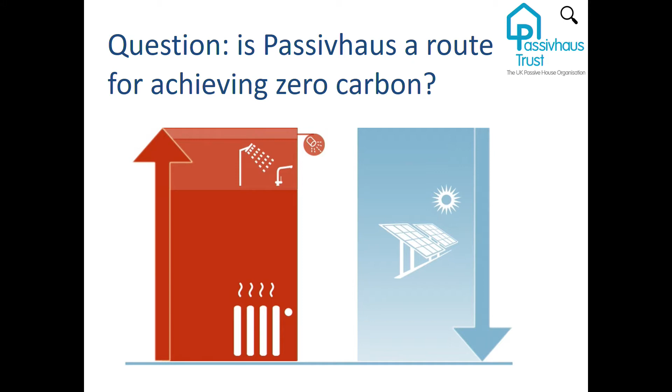Thanks John. As I've just been introduced, my name's James. I'm from Mikhail Riches. I was the associate in charge of Goldsmith Street, which has kind of won the Stirling Prize this year. So this has been awarded the UK's best building of 2019 by the RIBA.

I think what this presentation tries to cover is what makes the scheme special, because actually in many ways it's a very ordinary scheme. I think a lot of people have wondered why it's been put on a pedestal as this best building of 2019, and actually I think it's that quietness that makes it special, and it's all the things that you don't see, which I'm going to touch on today, which makes it hopefully an incredible project.

We call this presentation Creating Buildings People Love, and I think that's what we're doing as a practice - building homes, building communities. One of the things Goldsmith Street has done as a project is looked at social housing in a new light, actually taking sustainability to this sort of level rather than just this thing that everyone's doing because it makes them feel better.

So given that I'm here talking about Passivhaus today, it's been recorded as the largest 100% social housing, 100% Passivhaus scheme in the UK. This project's been on the books for nearly 10 years. I've been working on it for 5 years. There was a recession in between. And our client, Norwich City Council, has really had to fight hard to keep this mandate of wanting to deliver a passive house project, which is not easy.

Just to rewind 10 years, this was a project the practice did in Elmswell in Suffolk, called Clayfield. This was at the time seen to be groundbreaking. It used a lot of very sustainable, low carbon materials. But what made it special was that it was a solar scheme, as we called it at the time—not a passive house scheme, but a solar orientated scheme. It did the classic magic arrows of ventilation and sun path.

There was some serious research done by Arups post occupation. And what that taught us as a practice was that the solar aspect of the scheme, that free energy capturing from the sun, really worked. A few years later, that knowledge was taken into Goldsmith Street as a very simple premise of orientating your buildings to capture free energy from the sun.

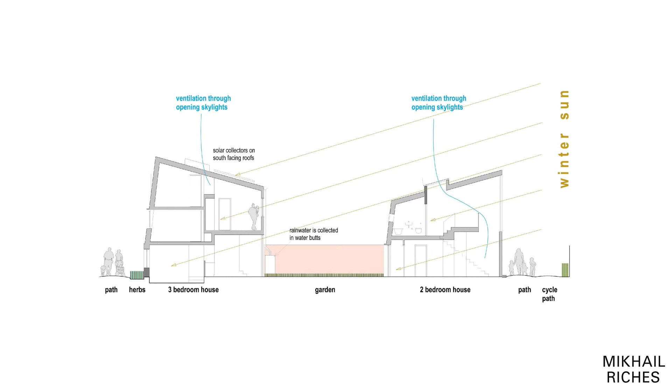So part of capturing that free energy from the sun is making sure buildings don't overshadow other buildings, thinking about the site plan, thinking about solar orientation. But also, this isn't just about energy—this is about creating places people want to live. So one of the emphases of this scheme was thinking about landscape, how landscape and the use of the car can be embodied in the scheme. Car usage has a huge carbon impact, and it's about trying to create a neighbourhood where people didn't feel reliant on the car, and it wasn't solely designed around the car.

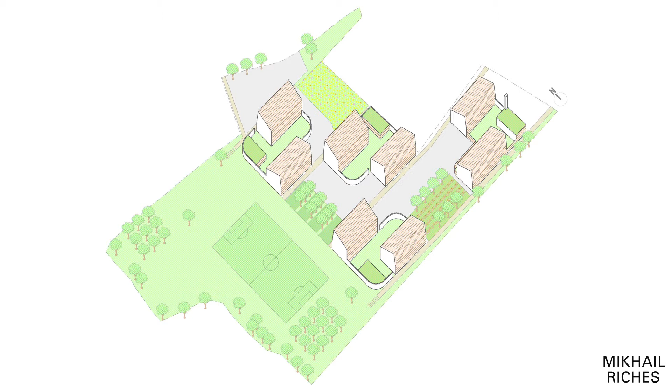Just conscious of time. Another key aspect of the scheme, nothing to do with passive house, nothing to do with carbon, but actually creating places where small children can play and creating viable neighbourhoods and communities.

So on to Goldsmith Street. As it's been said, it's won numerous awards this last year, including the Stirling Prize, Housing Design Awards, Neave Brown Award for Social Housing. I feel slightly bashful presenting this, but I think what's incredible is it's really been noted that the standard of social housing in this country can be lifted, and that local authorities delivering it to a much higher standard than some developers should be promoted and encouraged. Also, I think from us as a practice, it's giving local authorities the confidence that it can be done, and that it isn't this big risk they need to take on.

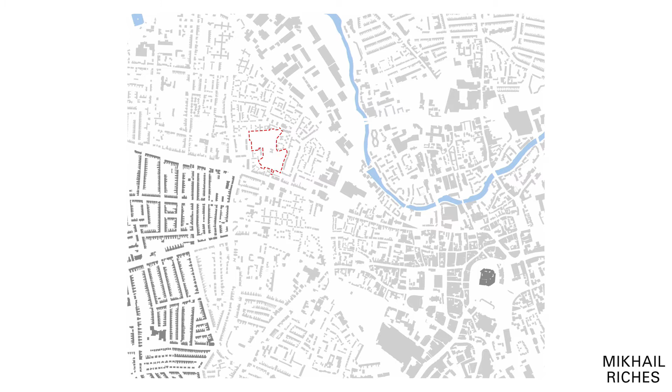Just very quickly about the project. For those of you who know Norwich, the site is to the west of the city centre. It's a 10-minute walk, so very easy to walk into the town. It's next to an area called the Golden Triangle, so it's street upon street of Victorian terrace housing, like you might find in any town or city in the UK. Very familiar, very simple.

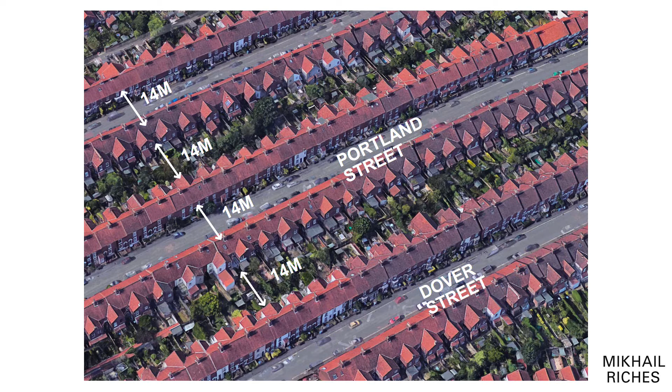One of the things we observed at the competition stage was that those terrace houses were 14 metres apart. Most planning authorities encourage a 21-metre overlooking distance, so we've squeezed that site section together. In doing that, we've had to think about how those buildings might overshadow each other, so thinking about solar orientation is really key, thinking about the building form and form factor - all very important. We took that typical Norwich street section of 14 metres and reinterpreted it as a 21st century street section using solar principles and passivhaus principles.

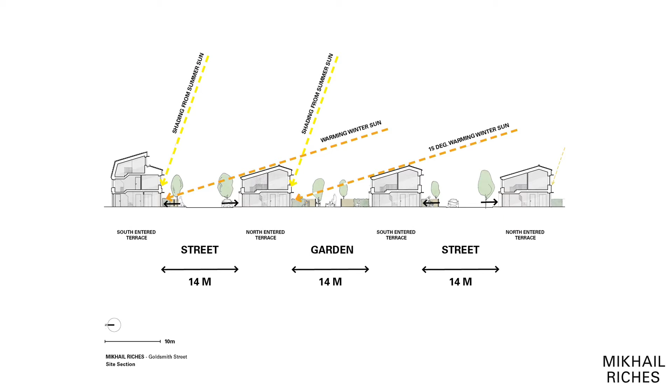So just 6 very key simple ways of thinking about how you could make a passivhaus project and what makes a difference to others. These are my 6 points, not Passivhaus Trust announced ones.

Number 1 is you need really good air tightness, so 0.6 air changes an hour, so you're creating a very airtight box so you're not letting that heat escape through drafts.

Number 2 is any heat that you do have in the building, you need to keep it by having really high levels of insulation. So at Goldsmith Street, the walls are 600mm thick. Of that, 400mm was insulation - huge amounts of insulation relative to what you're used to, and that's purely just to keep that heat in.

Related to insulation is triple glazed windows. They're not a big uplift in cost, and I think they should just be specified as standard across most projects. It's an absolute no-brainer given the number of benefits they have.

Partly what goes with that is number 3, which is about where are you getting this free energy from? A typical 2-bed house on Goldsmith Street has heating bills of £150 a year, and of that, £90 is the standing charge for gas. So actually it's only using £60 worth of energy a year for a 2-bed house. It's incredibly low - these are genuine figures. It actually works, which always surprises me. But that's what the PHPP model is there for, it's giving you the data to support the design work that we're doing as a team.

But critically, you've still got to get that heat into the house, and you're doing that by basically using the sun and getting that free energy, which is what number 3 is indicating - so good solar orientation. At the same time, number 4 is about not getting too much sun, and that's why you need to think about solar shading. A south-facing window, you're going to cook in the summer, but if you carefully calibrate your shading, you can mitigate that risk of overheating, which is what we've done.

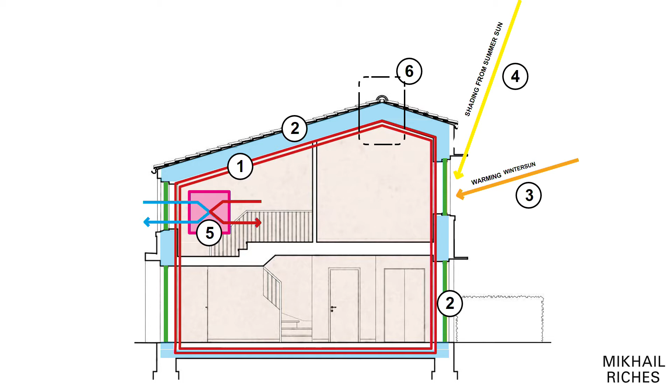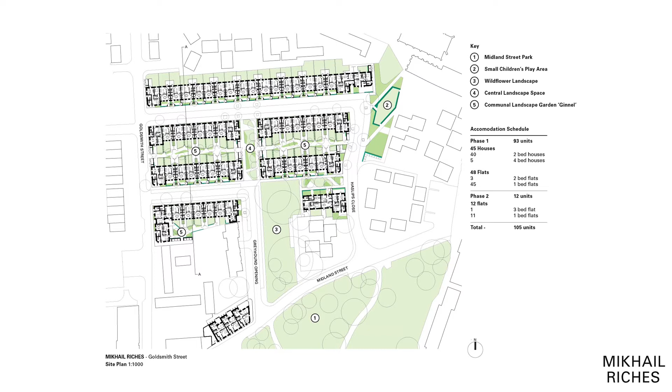One of the big ideas we had about the scheme was this idea of a playable landscape. I touched on creating communities earlier. The central garden space running down the middle of the scheme gives all residents access from their back doors to that space, and effectively everyone's given away a little bit of their garden for a greater benefit - that shared landscape space running down the centre of the scheme.

The client took a massive risk on allowing us to do that, and we were really trying to encourage them that this will be an amazing space, it will work. There was always a risk that it could have just been full of fridges and mattresses, a dumping ground, but residents have really taken that space on, and it's so joyful to see children using it and people engaging with their neighbours - it's become a very simple tool for people to get to know each other.

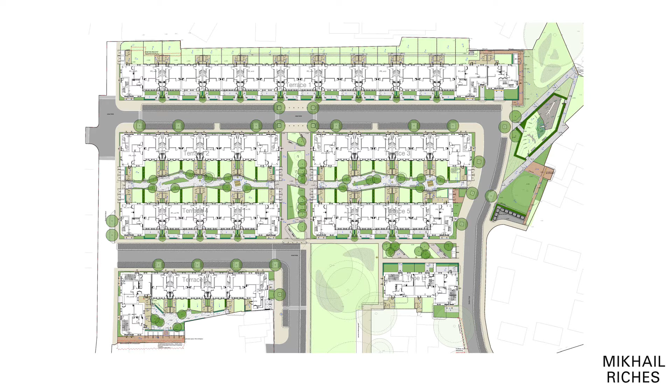Just a couple of images of the scheme. This is that play space down the middle, connecting into other play spaces.

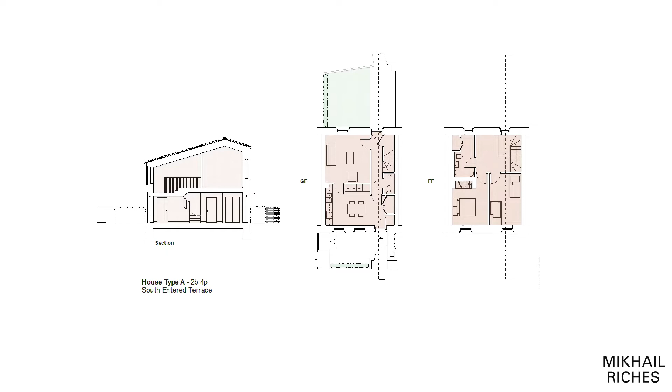Our house types are very simple, 2-bedroom. We've orientated most of the habitable rooms so they're south-facing, thinking about solar orientation and where you're going to want to be. Our kitchen dining spaces have really good south light, and the 2 bedrooms on the first floor are also south-facing. You'll see we've orientated the living rooms and the bathrooms on the north side, and I'll come on to a picture of that in a minute.

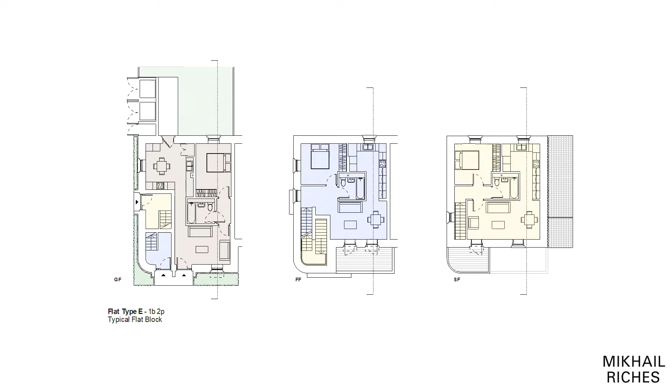Just on the material palette, something to touch on with Passive House that really annoys me: you don't have to use Passive House certified products. As long as you've got a good Passive House designer, they can make sure the products you're specifying actually work as part of the design. I'll just move on from that.

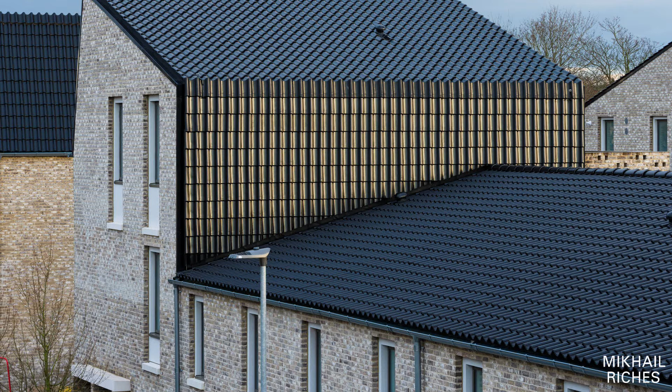And I'm just going to wrap up with a short video that gives a real good feel for the scheme.

There's a long history of council housing—it's something that's been happening over 100 years. It's great to see that they're able to do it again, because if you look back at some of the most forward-thinking and innovative housing solutions, they have come from councils. We've seen that the private sector can't deliver sufficient homes that are affordable for people, and I think it's great to see more councils developing.

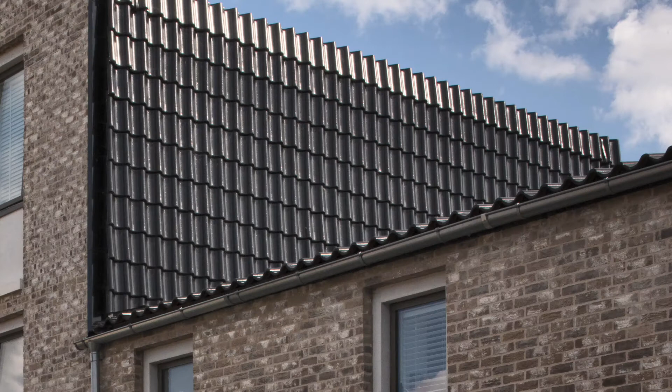The roofs are made of black glossy pantiles, a material you see a lot in Norwich because it's closely linked with Holland. A lot of the Dutch materials ended up here, so a lot of the buildings around have pantiles.

I think it's really wonderful to come here when the kids are back from school and see them all playing in the alleyways. It's what we hoped, but we were slightly nervous about how they'd work. Actually, people tell us it's been a mechanism for meeting neighbours and for their kids getting to know each other and making friends. So that's brilliant, it's great to see people living here.

And that's me done. Hope you enjoyed that.

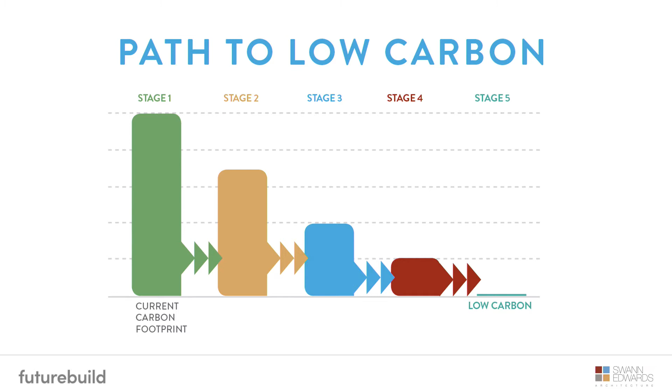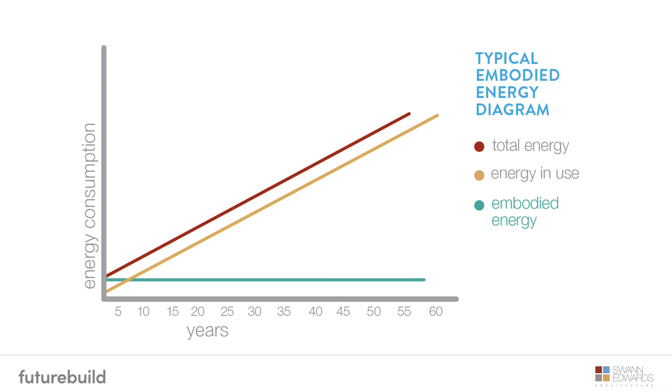Now mentioning the embodied energy, it's important to note - this is a simple graph and oversimplifies things - but the initial embodied energy of the project is far outweighed during the building's operational energy and carbon emissions. It's not to diminish the importance of embodied energy, rather to ensure the focus is on reducing life cycle emissions. With that in mind, I consider it's the responsibility on us as designers to design intelligently, ensuring maximised occupant comfort with minimum energy use.

That's kind of what we've embodied in our path to low carbon, so we consider the best way of doing this is combining passive and active design strategies, whereby the building form is optimised and combined with efficient low energy M&E systems, and we then seek to meet that residual requirement with renewable technology.

Step 1 is the initial feasibility and site assessment, where you look at orientation and develop your high-level strategies. Step 2 is where you respond to the opportunities and constraints of the site, combined with the client's brief, to deliver optimal building and fabric design. Step 3 is to use efficient M&E systems for the project, ideally low-tech as much as possible. Step 4 is to meet the residual energy needs through renewable technologies. And step 5 is looking to reduce the embodied energy, which is intrinsically linked to step 2 in achieving the building performance.

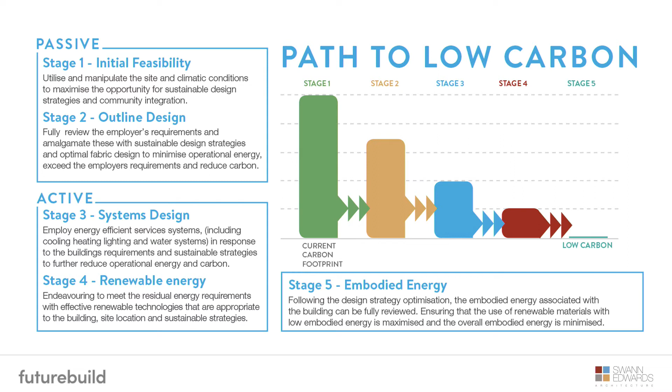Now, with regards to Farview Barn, we undertook initial traditional site analysis, looking at the built form of the area, the sight lines and views, boundary conditions, as well as the climatic conditions of the site - so the site orientation, solar exposure, prevailing weather, etc.

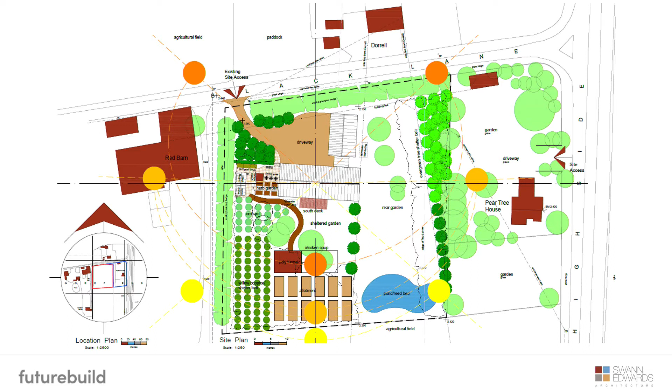Very early on in this process, we decided that the building was going to take an agricultural style in form. It was going to be elongated east-west, as you heard just a few moments ago. So here's the floor plan for the building. It's been designed around the path of the sun, with a large south-facing elevation and large south-facing roof, which we'll come on to later. The rooms that require least heat, such as utility rooms, toilets, and bathrooms, are located to the north. Rooms that you'd like to benefit from evening sun, such as the snug, are located to the west.

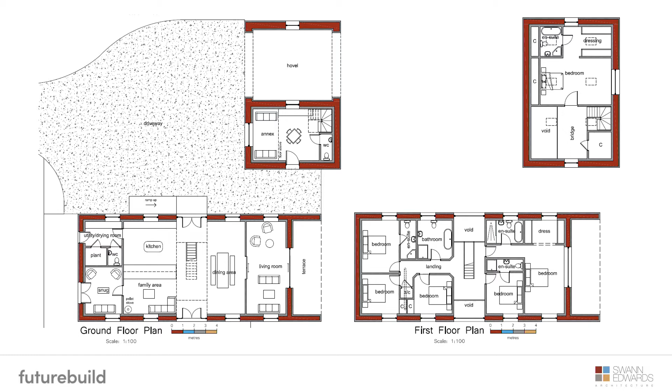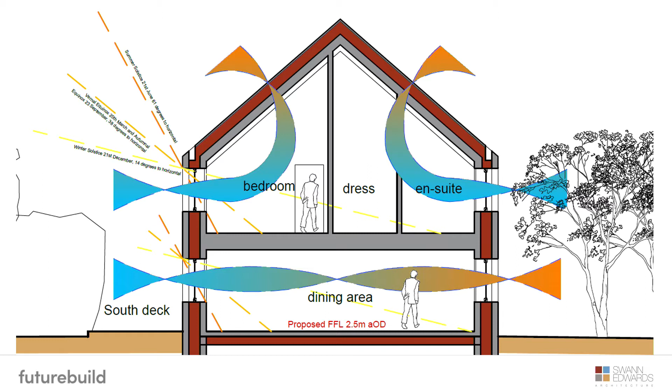As mentioned earlier, this is an overly simplified section demonstrating the principles of cross ventilation through the space, the fact that the building is wrapped in super insulation, and again the three lines there: summer solstice, winter solstice, and equinox. What we sought to do with this project was optimise the plan depth, so we got maximum winter solar penetration, and also positioned the windows within the depth of the wall build-up to ensure minimal summer sun into the building.

Form factor is a very important point when designing a passive house. I've pinched this diagram from Elrond Burrell's blog, but it illustrates it perfectly. The form factor is the relationship between the floor area and the external heat loss area of the building. The most pragmatic, efficient shape being a cube, illustrated with a 2.9 figure here. Farview Barn, with its elongated form and vaulted ceilings, deliberate architectural choices, has a form factor of 2.3, with the optimum figure for a passive house being around 3. Anything above 3 and you have to seriously increase insulation requirements. Being at 2.3, we're perfectly placed to remain on track to achieve the passive house brief.

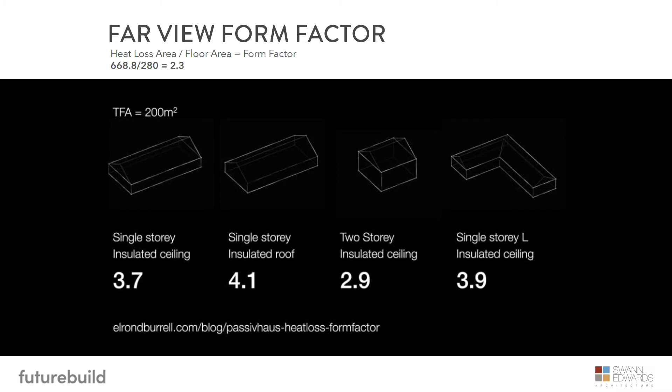However, the client wasn't keen on this, so we worked through with the PHPP software a night cooling strategy and assessed the risk of overheating. The outcome was that PHPP identified a 4% risk of overheating throughout the year, meaning temperatures above 25 degrees centigrade. That was acceptable to the client and also to the certifier as well, with the client agreeing to install external blinds if needed, which they haven't done to date.

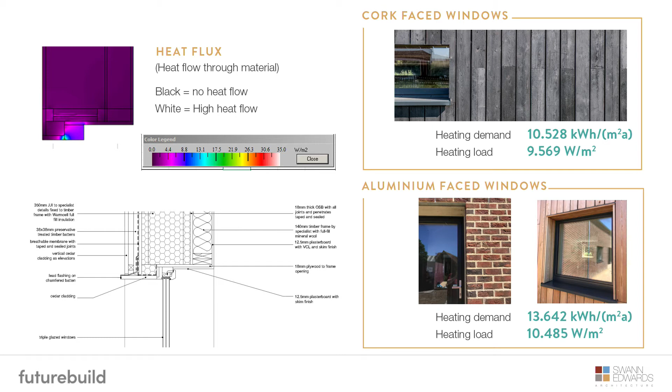As mentioned, air tightness is key with passive houses, as is wind tightness. Wind tightness is as important as air tightness to ensure that wind washing through the external envelope is reduced. This is where external conditions of the building can increase the rate of heat loss through the fabric. So a simple form is your friend with both air tightness and wind tightness.

The clients were able to complete the wind tightness layer themselves on site, sealing and taping all the junctions. For the air tightness strategy, an important point to note is a lesson we learnt on our own office: not all OSB is created equal. We installed 18mm OSB on our office.

We found that when we did the air test, it failed because the OSB was leaking. We learnt a lesson from this, and on this project we used smart ply with taped joints, with all the junctions taped with the windows and floors. The result was we achieved an air test of 0.3, with the Passivhaus limit being 0.6. I was very pleased with the strategy we used, and it worked very well.

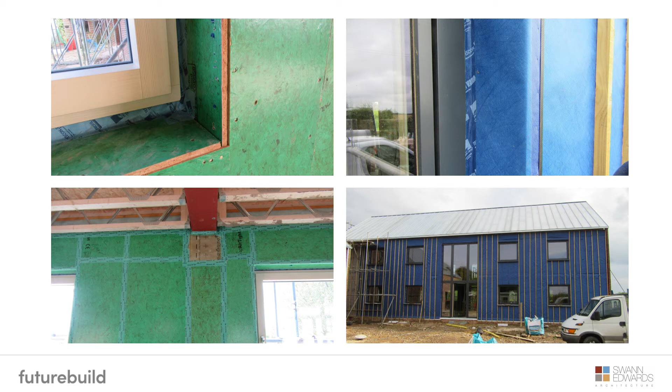Now, thermal bridging. Thermal bridging was considered from the outset on this project and was very important. You can see in the top right-hand corner there, the construction of this project was a twin stud timber frame: 89mm stud internally, 89mm stud externally, with a separating piece between.

That's then blown with platinum bead insulation, as you can see on the top right. An issue with twin stud timber frames is the spacer between is usually a metal spacer, which again results in increased heat loss through the walls. So we worked with the timber frame manufacturer and Warm to develop timber spacers, which is why that photograph at the top left is on here.

Going back to the overshading, you can see in the bottom left-hand corner, the overshading was done with an independent steel frame structure. So we didn't puncture the wind-tight layer, the airtight layer, or the insulation layer. That was completely independent and removed any issues with sealing up or thermal bridges in that location.

We were almost thermal bridge free with the construction, with the exception of the 4 columns, shown in this central photograph. We worked with a guy called Nick Devlin to do a 3D model of this. The solution was to bring the columns inboard as far as we could within the wall construction to ensure it was wrapped in as much insulation as possible.

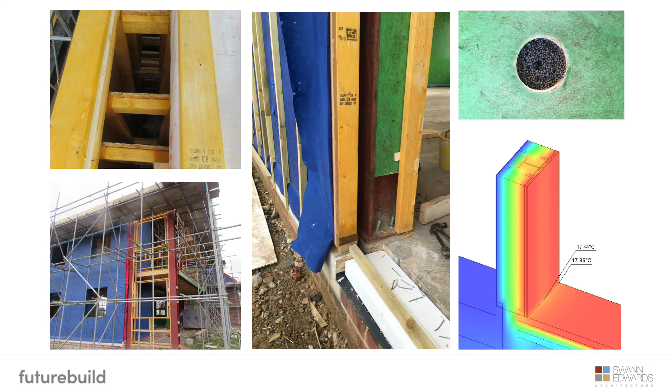We found a product called Armadillo, which, if any of you remember the Dime Bar advert, that's what makes me think of it every time. It's effectively a thin, high compressive strength insulation, at the bottom of these columns here, which ensures that when we inputted the thermal bridge into the PHPP, we remained on target.

So that was steps 1 and 2 from our process, which reduced the heating demand of the building through passive measures. At step 3, we worked with Alan Clarke and the Green Building Store to design efficient M&E systems. We adopted a low-tech approach: standard things like LED lighting, low-flush toilets, efficient appliances and the like.

We have an air source heat pump, which powers the underfloor heating at ground floor and radiators at first floor. The radiators at first floor, according to the client, have never been switched on - they're not needed. We also have rainwater harvesting and the all-important MVHR.

The MVHR was also key to our overheating strategy, as it has a summer bypass in place. This means you can switch off the heat exchanger, and at times of lower temperature outside during the summer months, it will bring in cooler air throughout the night.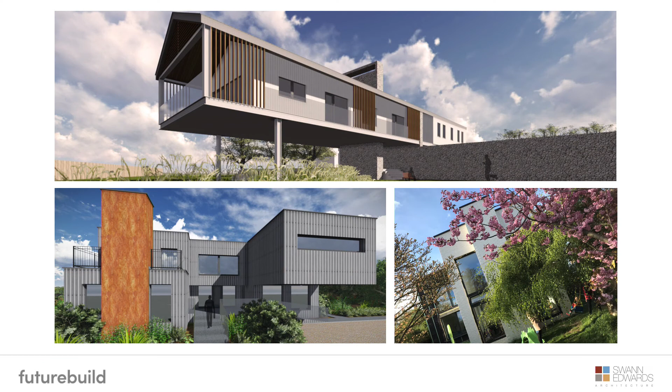So these are just a couple of projects we've got on at the moment. The top scheme there is a zero carbon scheme approved under paragraph 79.

The bottom left is a shipping container project which is currently on site at the moment, again to be a certified passive house. The bottom right is my own home, which was a traditional masonry construction, 300mm cavity, and I keep telling the wife it's finished, but I'm not sure she believes me.

We also decided to walk the walk and follow in Chris and Frank's footsteps. This is our own certified passive house office, which we completed at the same time. It's a great environment to work in, and it's also a fantastic demonstration for our clients as well.

So here are Chris and Frank. I just wanted to put them on here as I owe them a massive gratitude of thanks, and just want to say thank you to them.

And that's me done. Thank you very much.

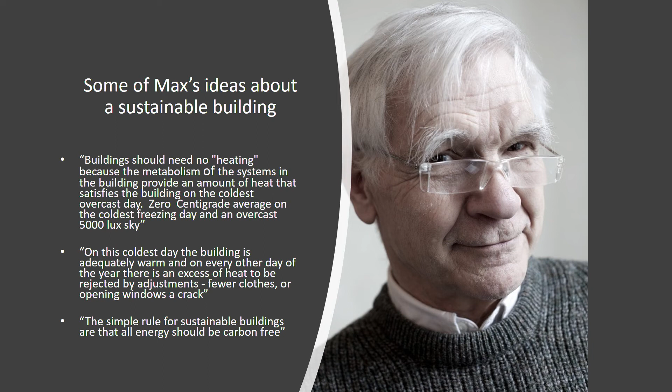One of his touchstone projects is Caspar II, with Levitt Bernstein Architects from some time ago. In some ways it was Passive House before Passive House. They designed the mechanical ventilation system themselves, and the energy bills when it was built demonstrated that space heating was covered purely by the occupants, their own metabolism, and the electrical devices they used day-to-day. Domestic hot water was another energy demand on top of that.

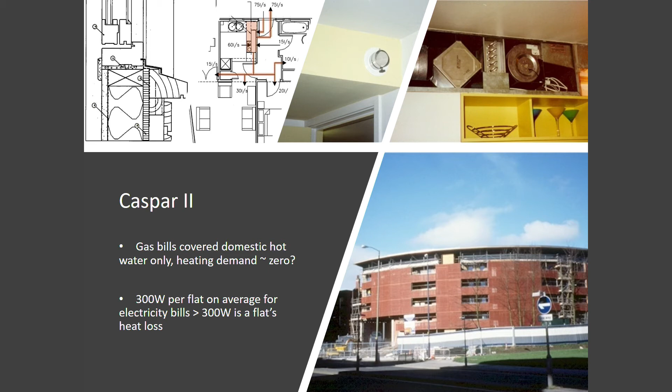So if you want to design a very low energy building with zero heating demand, the Passive House process is a robust and reliable way of doing that, with its on-site accreditation and approach meaning you're likely to actually achieve that goal. This leads to Max Fordham's house in 6 Camden Mews.

Because the fundamental goal is zero heating, it perhaps has smaller windows than many Passive House buildings, particularly to the south, because Max's main aim is no heating on a freezing, overcast day when solar gain is less beneficial. It's also located within Camden Mews, where there are quite onerous planning constraints - various houses were built by architects for themselves, such as Ted Cullinan on this mews, and the site context is quite onerous.

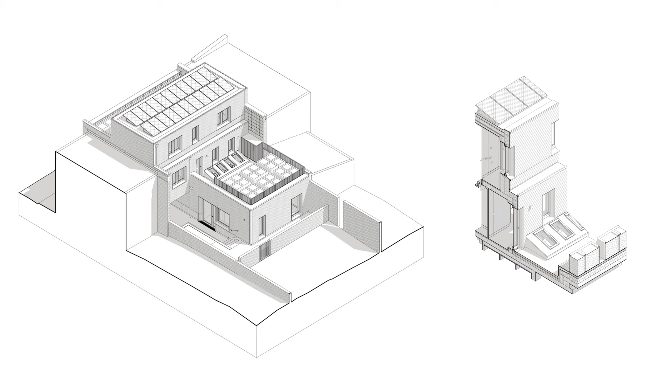So Raphael, do you want to talk a bit about it? I'd like to tell you more about the house envelope and where we picked it up. This was a traditional contract - we won the tender looking at the project from the Revit model. It seemed to be an extremely simple project. We were very excited to start on site, and then we realized it is not that simple.

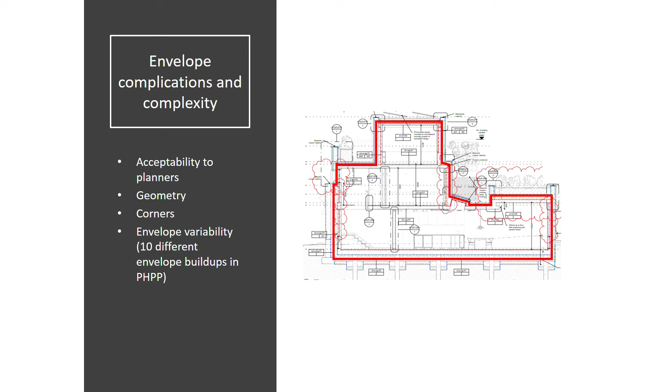Due to planning constraints, the envelope construction was very difficult. We have many types of construction on site - reinforced concrete frame, masonry and cavity construction from the neighbor's side, and timber construction, I-joist filled with insulation, from site sections going back to the back of the property.

Because it was a concrete frame, we assumed the concrete itself would be pretty airtight, so we concentrated our efforts on airtighting the remaining walls. A more traditional method of membrane and tape was used. Nowadays on a construction like this, we'd probably prefer to go with a parge coat, simply because during the tests, air was filling up the void between the membrane and the block itself, causing a problem.

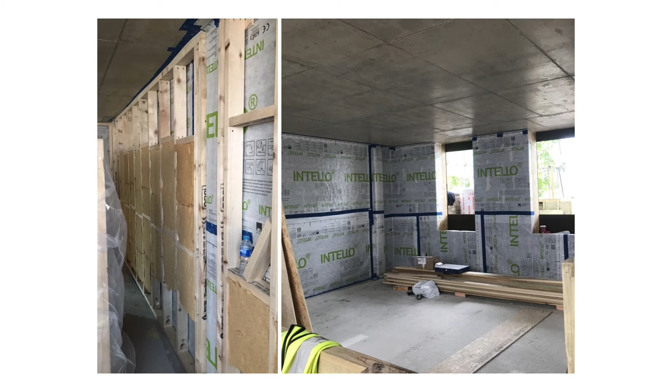Part of the design and planning was to provide what's called blue roofs, to attenuate quite a lot of storm water. This particular roof at the back had around 1 meter of soil, and we planted cherry trees or some other hazelnut trees on top of that.

Would we do it again? I have to say it was one of the most challenging elements of the site - coordinating specialist contractors, making sure it's waterproof while ensuring your insulation isn't filled with water. Having a roof over in the very tight mews was another level of complications.

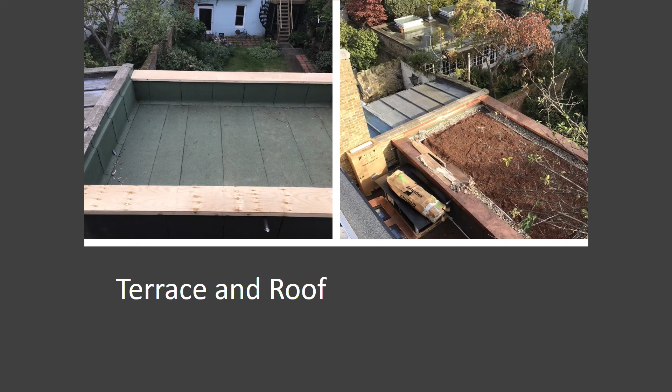Overall, the system was very simple. We had a design from Max Fordham suggesting that all the balconies and roofs have to be waterproof first, and then we build up the levels using gravel, put a special water attenuating board, and finish this with paving blocks.

I think we want to move on to some more exciting things because two previous presenters touched on building envelope and passive house quite a lot. So we want to talk to you about some exciting services.

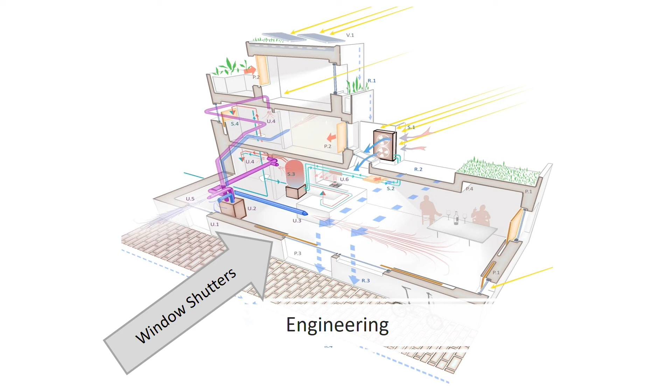One of the unusual things about Max Fordham's house is it has insulated window shutters. Max was actually inspired by electric car windows, which are airtight at 70 miles an hour and very robust. He wanted to recreate this airtightness with a movable thing that you close at night over your windows and keep heat in. I think it's something he's wanted to design and specify and have built in a building for a couple of decades, and finally, when he was the client, he got to make it happen.

So the idea is that at night time, you lose less heat through the window than you would, and then even on an overcast, freezing day, you get some positive energy benefit through the windows when they're open, and then you close them up again at night time. I think Max is quite happy that this has actually happened, and they work fairly well at the moment.

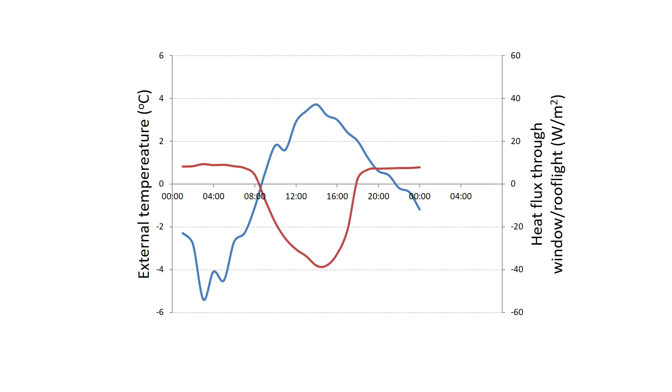We started out designing them because me and Max don't really know what we're doing with this sort of thing, with some industrial automation things, but then Raphael came along and simplified it quite a lot. Two of my friends knew that I'm a Lego fan, so we started this process by spending some company money on Lego Mindstorm. We're going to play you a video.

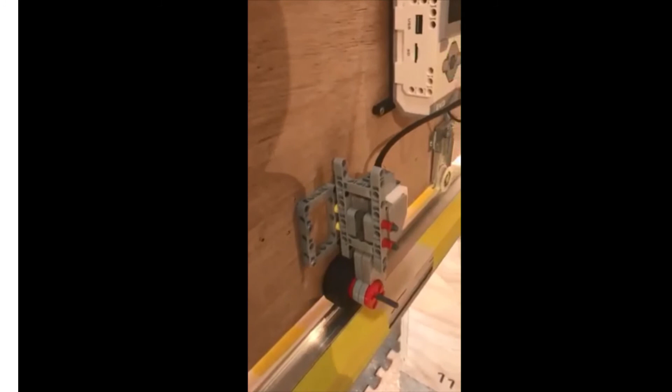We then purchased specialist worm gear motors, but that's basically the concept: a panel covered with ply has an insulation board inside, inside an aluminium frame, which is fitted within the wall structure. Then the panel slides into the wall and comes out of the wall.

What this design doesn't show is that all the panels on Max's house also have additional air tightness seals around them. And I think air tightness works around them quite well.

So if you've reduced the space heating demand of a building to as close to zero as you can get it, in a domestic building in the UK, the biggest energy use is then domestic hot water. So that's where more complex technology is focused.

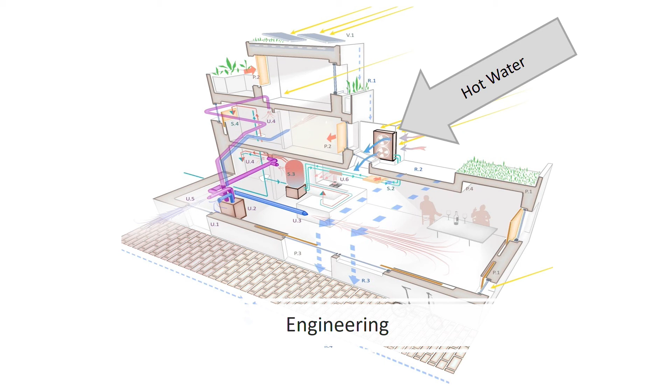So an air source heat pump, a package system, is installed in a very sunny location, and it's controlled in a simple way to heat 24 hours worth of hot water during the warmest hour of the day when the heat pump's at its most efficient. So it's a simple package system, but designed in a robust way to maximize its benefits. Here it is outside, behind a little wooden enclosure, and it works quite well.

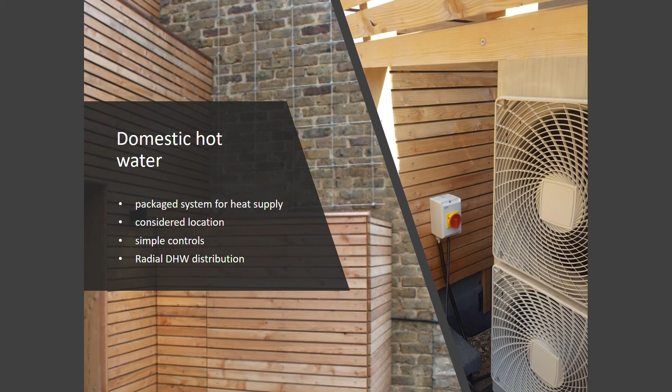Hot water demand is fairly low, and we'll look at the energy demand in a moment. The space heating demand - the aim is zero heating, but sometimes people go on holiday during the winter time and you need to heat a building up again, and also you might not get there.

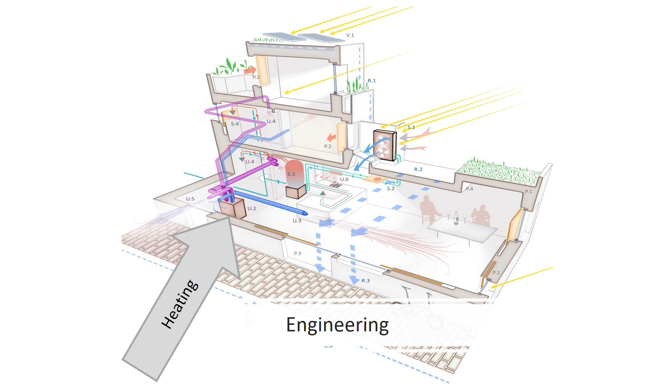So the space heating in this case is through an electric heater battery in the mechanical ventilation system, which is simple and does what it needs to do.

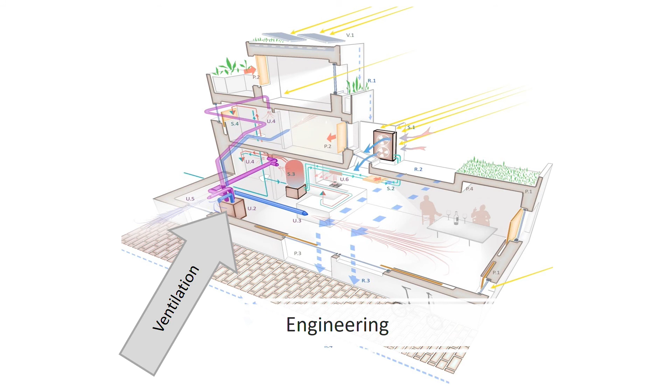The ventilation system is a Paul Novus, and it's fairly standard in most ways. Although because it is providing the heat into the building, how the air is put into the spaces is fairly important. So it's put in at high velocity to provide good mixing.

Max's original intention was this was just a stainless steel tube, but actually this was turned into a 3D printed diffuser.

Yes, I think you can all tell now that we are a bit of tech geeks. So we wanted to introduce 3D printing to one of our construction sites at all cost. And we had an amazing opportunity that we could print all the ventilation nozzles and adjust the cones, or even directions of the cones. In one particular room, the cone is slightly on the curve to basically avoid air hitting the client.

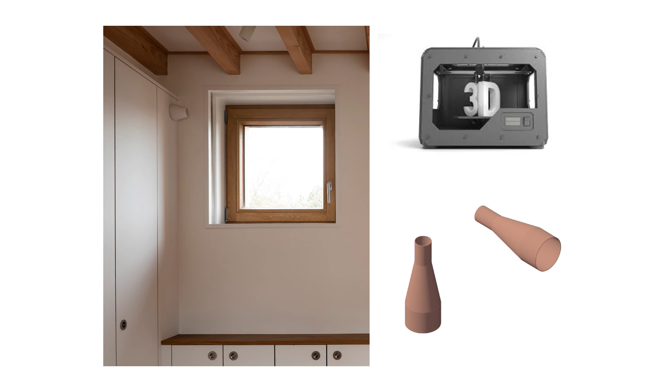I think overall, we're really interested in how this could be developed further, because the results of those cones and the aesthetics are quite encouraging. 3D printing, well, air diffusers is a good use for 3D printing because what's on the market isn't necessarily what you want for the air volumes that you need. As a practice at Fordham's, we've got a bit of a history of designing air diffusers, often made out of joinery, which puts a lot of pressure on a joiner to build something where tiny imperfections you can't see have big impacts in terms of creating regenerated noise and so on. So I think 3D printed diffusers are quite a good thing to do.

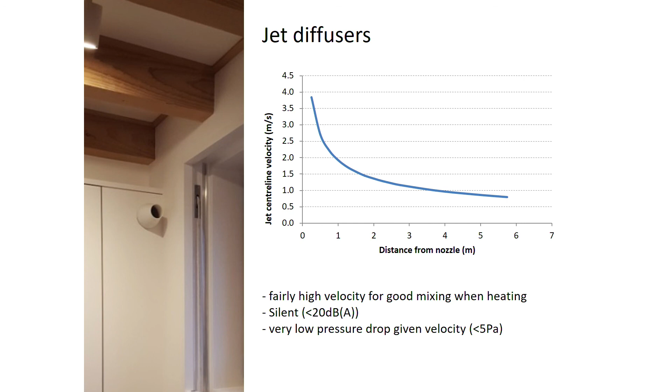With lots of buildings that we work on now, towards the beginning we often talk about these super insulated buildings that are very airtight and mechanically ventilated to recover heat. Some clients get nervous about what they're like in the summer, and whether they get too hot.

But during the heat wave of last summer, July 2019, it hit all the newspapers - the hottest day on record in the whole of the UK, measured in Cambridge at 39 degrees - within Max Fordham's house it never got above 30. Here the black line is the measured inside air temperature, and the red line is the measured outside air temperature at Max's house. So just because you made a very airtight building, it can still work really well in warm weather. In this case, windows that open all the way, and a thermally massive structure for the spaces occupied during the day.

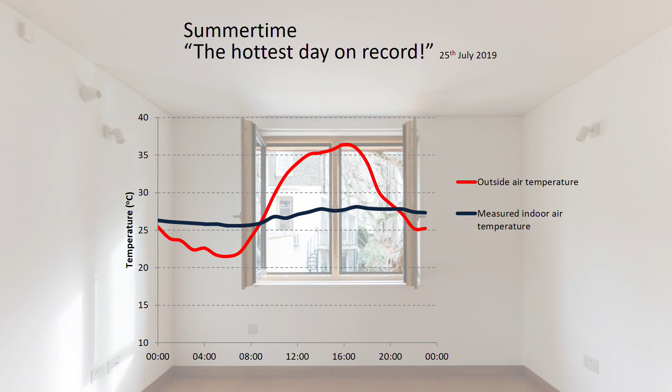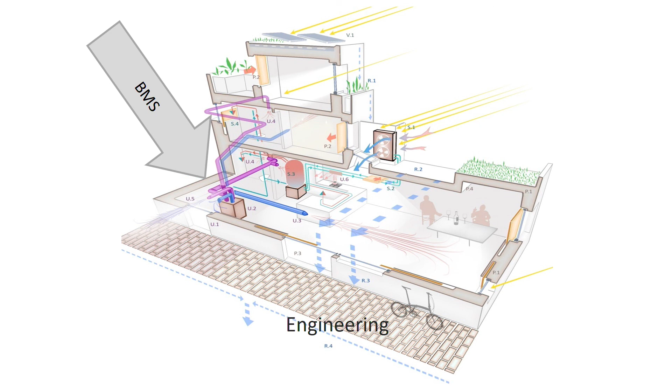So to control all of that, we have air source heat pumps, lights, additional security, a door entrance system, and a few extra safety features for Max as well, because he's an older gentleman and might require a panic button. We also had those shutters. We decided to go with Loxone - there are many different types of BMS system on the market, but we like one that you can incorporate quite a lot of different products and simple sensors into.

How did it work? It's been lived in for a year now, so its energy consumption is shown in the middle graph. If you take away the blue bar, which is space heating, then it would be more or less carbon zero in its own terms in operational use, because the blue bar to the right is what the PV array on the roof provides. So it's a lot less than a typical building. Now it's not all the way there, but is that such a bad thing?

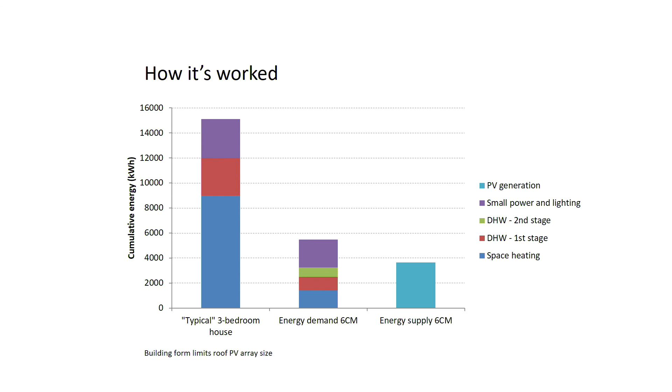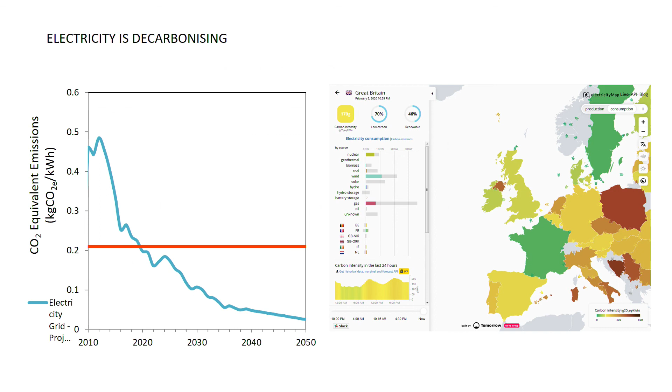Electricity in the UK is decarbonising well. If we want a zero carbon society, then electrifying all the heat in buildings is perhaps a sensible thing to do. However, if you look at the whole of the UK, the heat demand in winter is about 5 times what the electrical grid provides at the moment. So simply electrifying everything isn't straightforward.

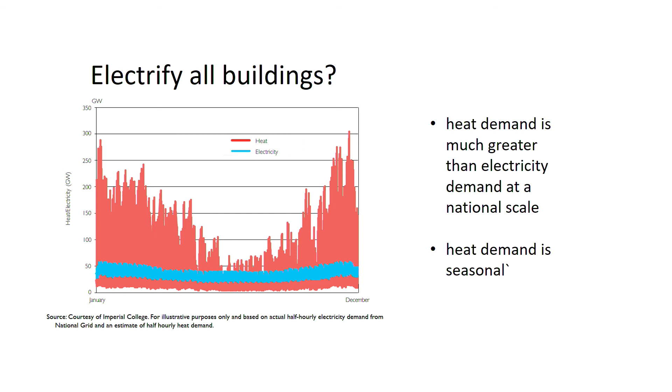However, the marginal increase in electricity for a building which doesn't quite make it all of its own does mean that decarbonising through electrification is fairly more achievable, I'd say. I think the site constraints meant that the amount of roof you could put PV on is limited - this is a 3-storey building. A 2-storey building, you might be able to make net zero in its own terms, with more than a third of the footprint available as roof space for PV. So within its constraints, it's doing really well, I think.

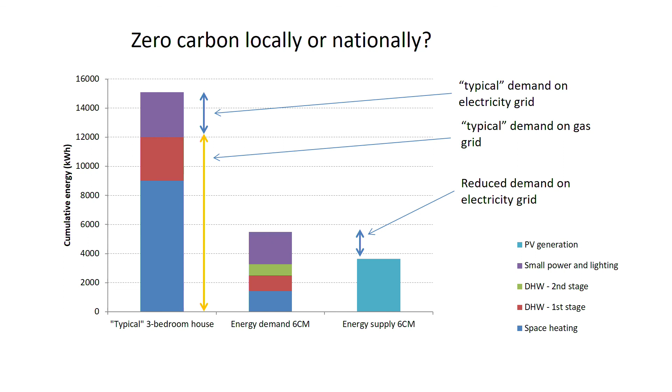Some of our clear conclusions: we understand windows can be big, but please don't make whole elevations out of windows - that really helps with overheating. In terms of our approach to 2-3 bedroom housing at the moment, we would try to recommend air-to-water heat pumps because they're a very simple system, potentially with direct electric heating as backup. We always concentrate on delivering an envelope as close to passive house standard as possible, if not passive house itself. Standalone MVHR at the moment is a good standard - we've used that technology and have no problems achieving excellent results.

And yeah, we think that we should electrify all energy consumption.